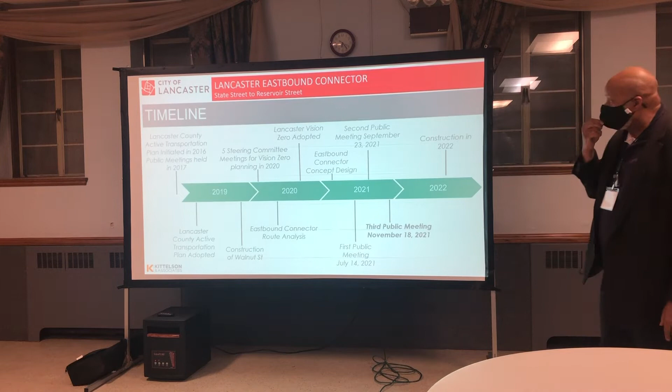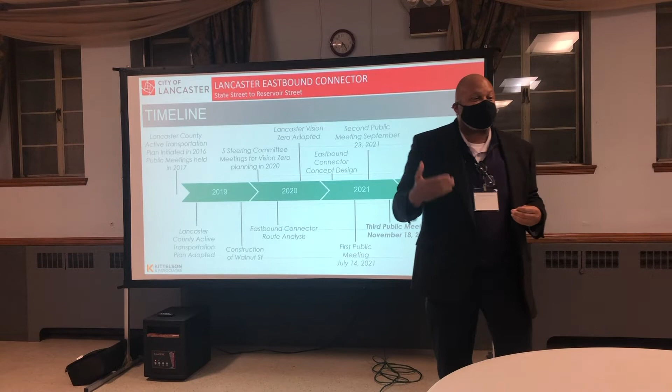As a quick reminder, the whole endeavor we're doing here is to try to make real something called the Lancaster County Active Transportation Plan that was initiated back in 2016. It was an effort to understand a variety of different ways that people can maneuver through the county and through the city as well. One of those key infrastructure elements was the bicycle network, connecting the bicycle network from within the city to the areas that go out throughout the county.

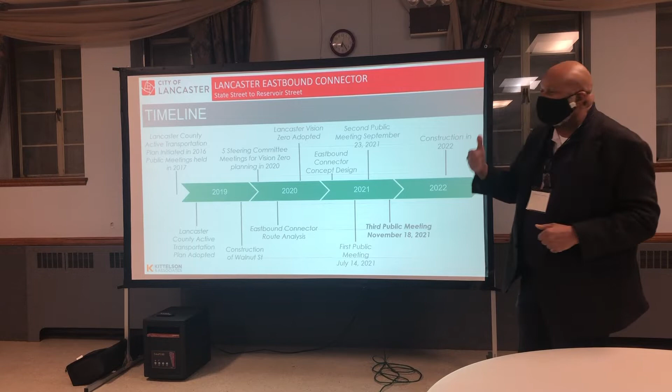There'll be more about that in the presentation, but the Lancaster County Active Transportation Plan was adopted in early 2019. The construction of Walnut Street was one of the first elements of fulfillment of that plan, and that took place also in 2019. There were 5 steering committee meetings related to Vision Zero planning in 2020, and a little bit about Vision Zero will be described here as well.

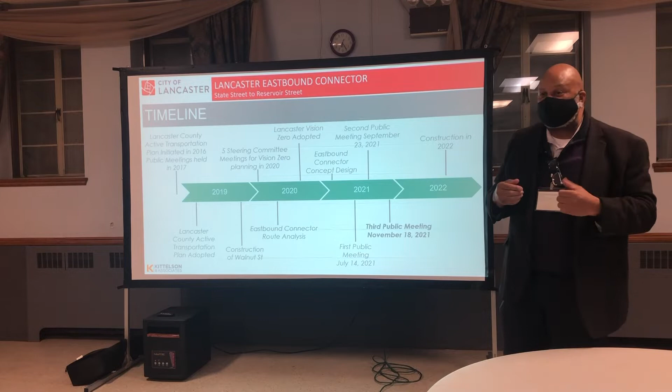The Eastbound connector route analysis was taking place in the early days, just before COVID started, in the early days of COVID, and a little bit of that explanation will be in this presentation as well. In mid to late 2020, the Lancaster Vision Zero was adopted — the idea that we will actually, and have, adopted Vision Zero as an initiative to reduce and eliminate dangerous accidents and deaths in the city of Lancaster by 2030. This active transportation plan is an integral part of the Vision Zero process. The Eastbound connector concept design was described in early 2021.

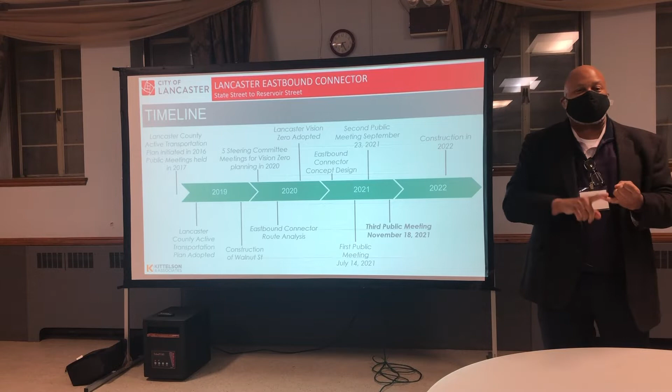The first public meeting related to the Eastbound connector was held on July 14th of this year. We realized that we did not necessarily give enough notice, and so we wanted to double down in our communications and the way we reached out to the community so that you understand what's going on. We opened up the Engage Lancaster site where you can submit comments at any time, and we established a more attenuated public engagement process so that we could make sure we're hearing from you and can respond.

The second public meeting was held September 23rd of 2021, and at that time we hoped we were addressing a number of the concerns raised earlier. We also let that be a more open forum to make sure that things that may not have been raised before, or that you felt weren't heard before, could be heard and understood. We hope understood well.

Tonight is a third public meeting which will be reflecting the input and what we've done to try to address those kinds of concerns. We're hoping you're going to be happy with it. We know that in public discourse we can't make everybody happy, but we are trying our best to do something we think can be part of a very strong, good, alternate transportation infrastructure.

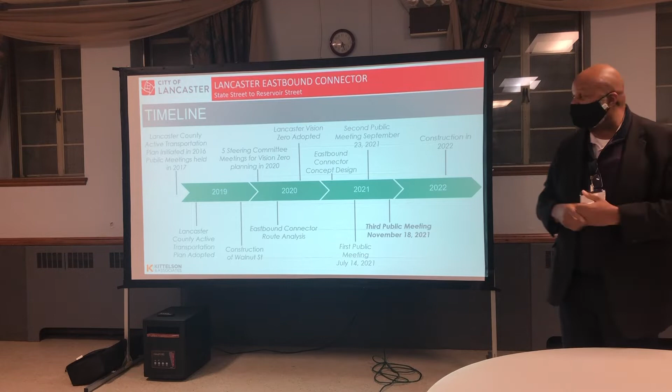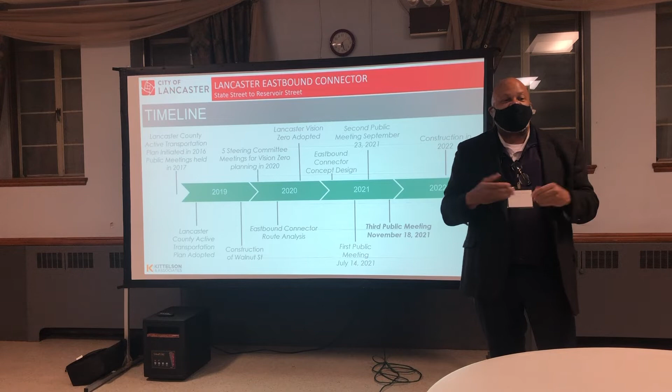We're anticipating construction for this to take place probably in late 2022. We realize that there is a water main along this stretch that will be installed over the earlier part of 2022, and of course we won't put the surface infrastructure on until that subsurface infrastructure is completed.

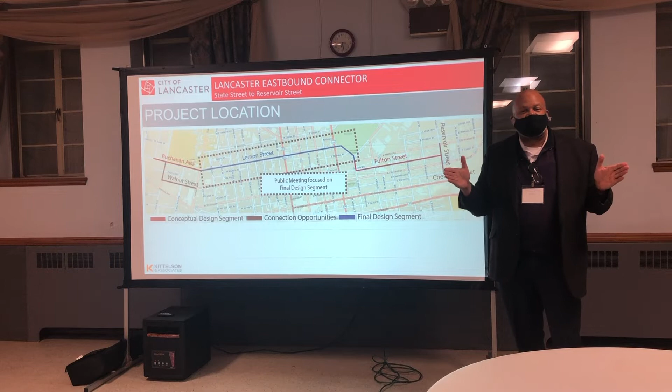So the public meeting tonight is focused on this particular stretch of Lemon Street from College Avenue over here to the park, to the cemetery. The rest of the Eastbound connector is going to be done in different stages, but the focus of the design we've been doing over the course of these last several months is just this particular stretch.

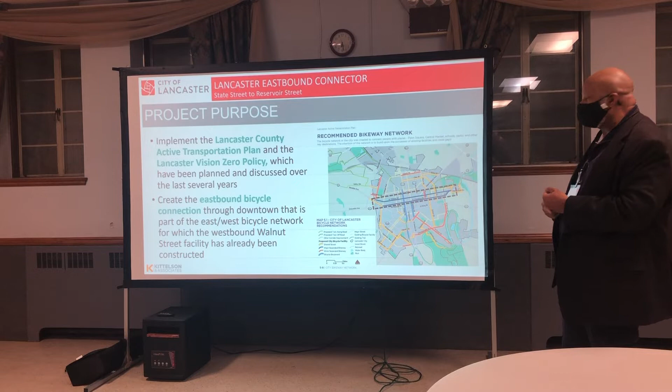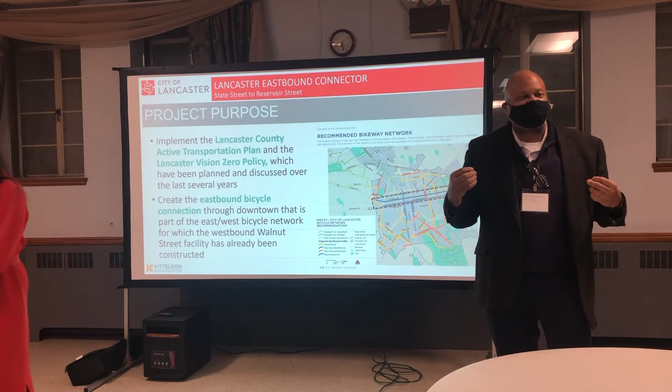So, shall I continue or shall I turn it over to you, Laura? I'm happy to. I'm going to turn it over to Laura, who is much better at describing some of the design elements that go into making the project. Cindy McCormick, who's the city engineer, and I are available to answer questions as we get later into the process. Carl Graybill, also from our office, is available to answer questions if necessary as well. So I'll turn it over to you, Laura.

Thank you. If everyone will just bear with me for one second. It didn't like the move. It wanted to stay in its same spot. Let's see if it'll come back and be my friend again. Thinking about it, thinking about it. Here it is, all right, current slide.

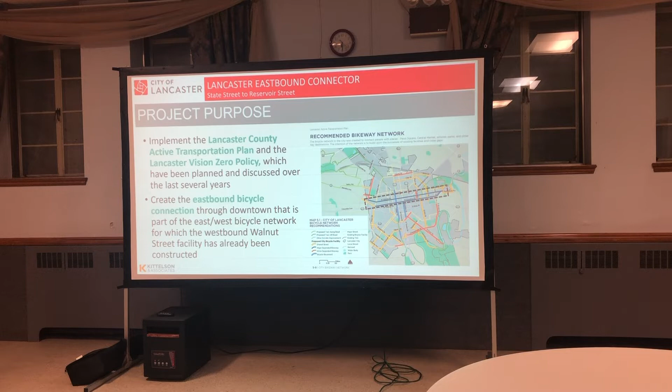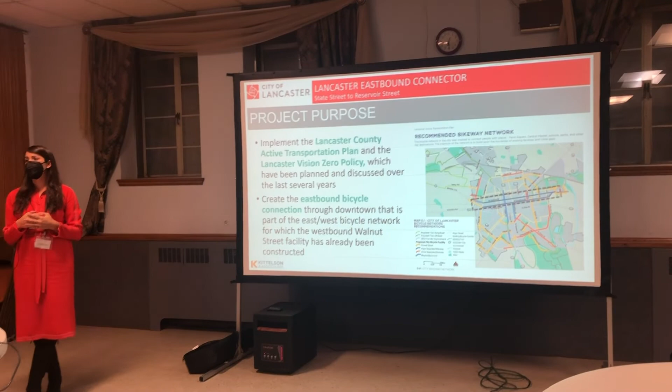Okay, sorry about that. For the project purpose, where this came from originally was, as Steve mentioned, this all started with the adoption of the Lancaster Active Transportation Plan and the activation of the Lancaster Vision Zero policy, which had been planned and discussed over several years. There was a series of public meetings over the course of developing those plans and a series of goals that were set—goals around creating better opportunities for non-motorized travel, increasing transportation options especially for vulnerable populations that don't have access to cars, around increasing safety, around decreasing the amount of fatalities and severe injuries. These were all of the goals in the public discourse that went into these two plans.

From them, the Eastbound connector was identified on the Active Transportation Plan as the eastbound route through the city of Lancaster. Walnut Street was identified as the westbound. This is really an opportunity to make a pair with Walnut Street, so you can go westbound on Walnut and eastbound on Lemon.

I do want to note that when this plan was first identified, Chestnut Street was the route originally identified to be the eastbound route. However, when we looked more deeply into the traffic volumes on Chestnut and the typical street section, we determined that was not going to be a feasible location to do a separated bicycle facility.

In order to get a separated bicycle facility there, you would need to remove an entire lane of parking for the extent of Chestnut Street, which we recognize is not feasible in a parking constrained area.

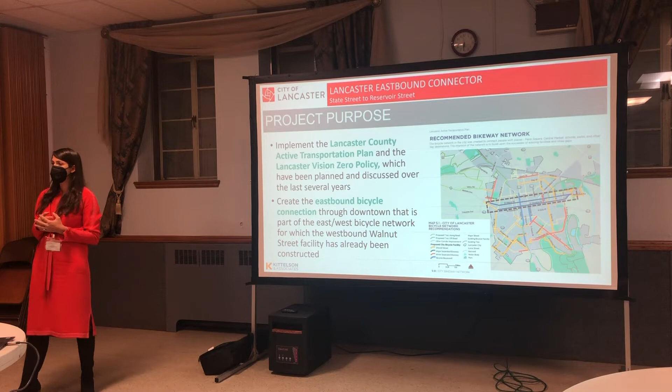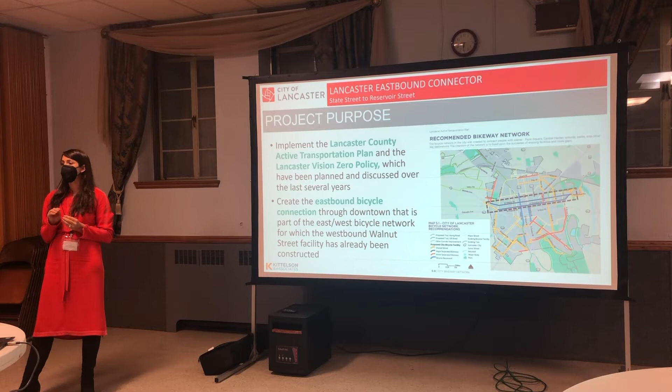So we did some additional analysis to look at other routes that could achieve that eastbound separated facility. We recognize there are other places in the city where you might be able to ride with traffic and feel fairly comfortable. But throughout the active transportation plan process, we were trying to identify separated facilities that can work for the largest number of riders, those who don't feel comfortable being with traffic. They need a separated facility to make them feel like they're able to be out riding.

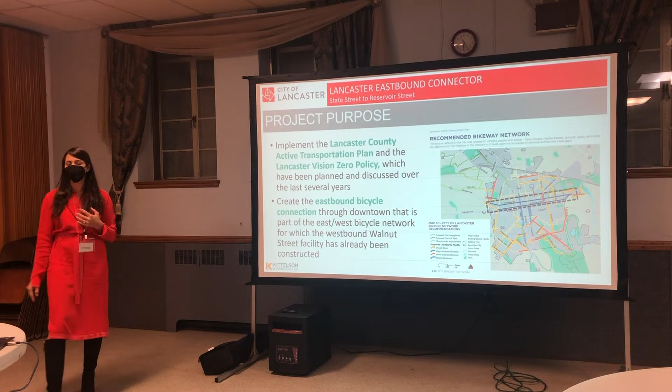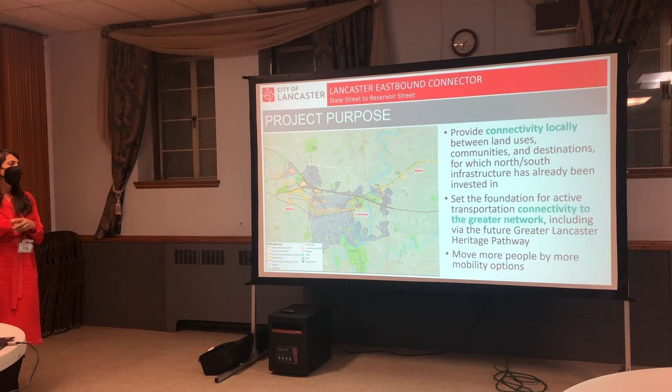In addition to the connectivity just directly in downtown Lancaster, there's also an opportunity to connect to the larger regional network through the future Greater Lancaster Heritage Pathway. You can see here how that connection is going to allow people to travel by bike to larger areas within the region.

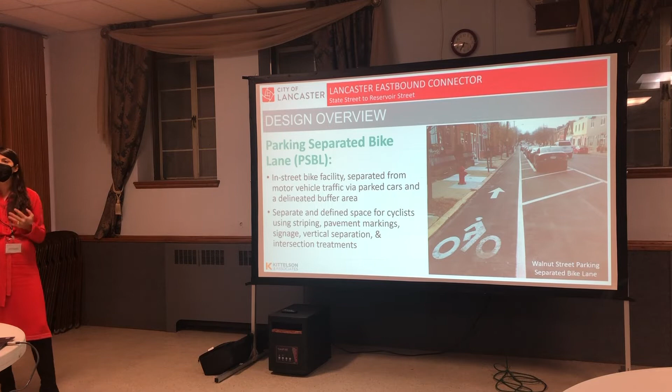Traditionally, when we think about parking, we always think about doing it right up next to the curb, then you might have a bicycle lane next to it and then travel lanes. In a parking separated bike lane, you switch the directions of the parking and the bike lane, so the bike lane is right up next to the curb. This is what you see on Walnut Street today.

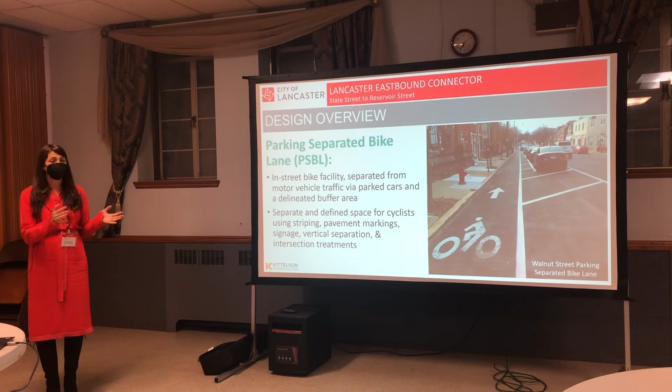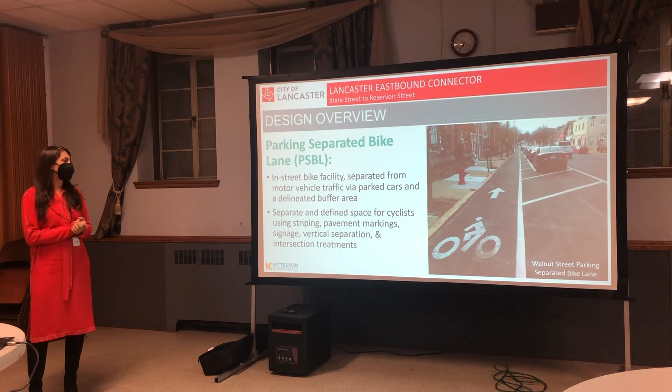There's then a buffer area between the bike lane and the parked cars. This provides room for a driver to open their door and not hit the cyclist riding through. And then you have the lanes of travel next to it, which once again provides that physical separation between the cars traveling on the street and the bicyclists in the bike lane.

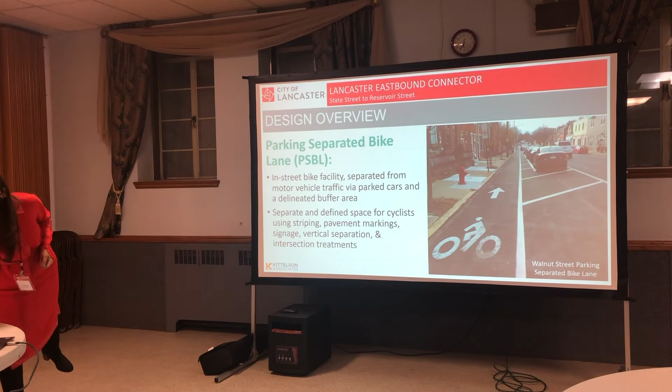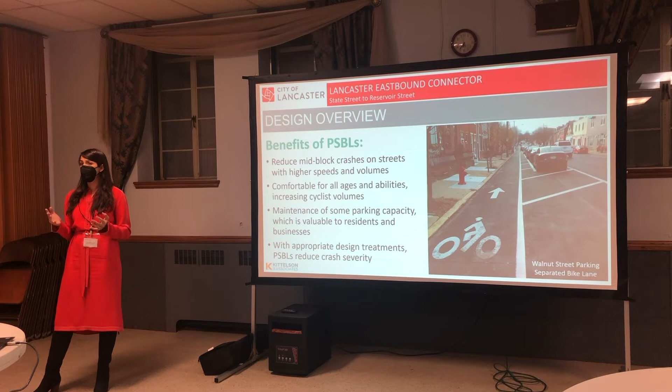Parking separated bike lanes are starting to be adopted more and more throughout the US. They've evolved as we recognize the need for safe separated facilities while also recognizing that we need places to park our cars. This means there's a bit of a trade-off for everyone. There are spots where you might lose a parking space at intersections to keep things clear. However, it does keep the majority of the parking as opposed to some other bicycle facilities that might require the removal of parking.

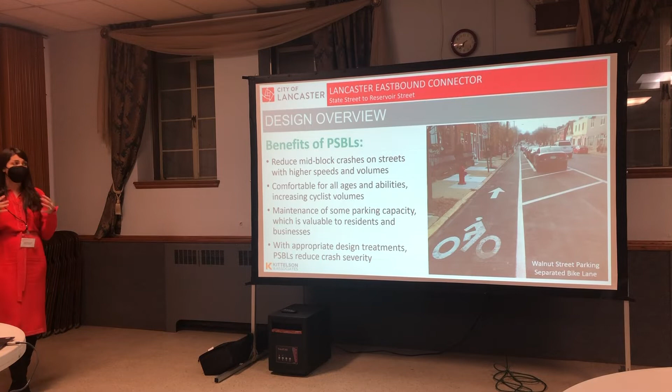One of the helpful things parking separated bike lanes do for safety is reduce the number of mid-block crashes on streets, especially with higher speeds and volumes, because bicyclists are fully protected mid-block and aren't getting hit by passing cars. This is critical for Vision Zero, since mid-block is where you have the highest number of fatalities and severe injuries, because cars are traveling fastest there. If you're on your bike and get hit by a car mid-block, it's very problematic. As cars slow down, that's where we see those severe injuries and fatalities lessening.

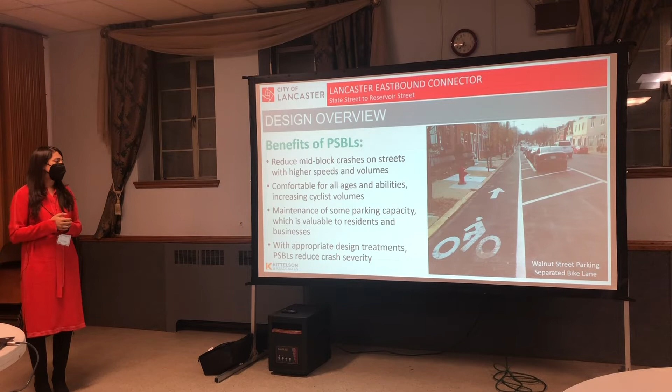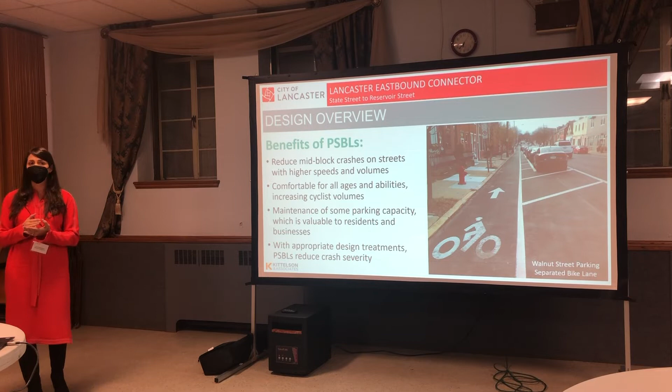It creates comfortable facilities for all ages and abilities while also increasing cyclist volumes as folks feel more comfortable using the facility. It does maintain parking in some capacity, and when appropriate design treatments are used, it can also reduce crash severity and make things safer at intersections. That intersection design is something we're really going to focus on in the meeting tonight, to tell you how we've changed the design for the intersections.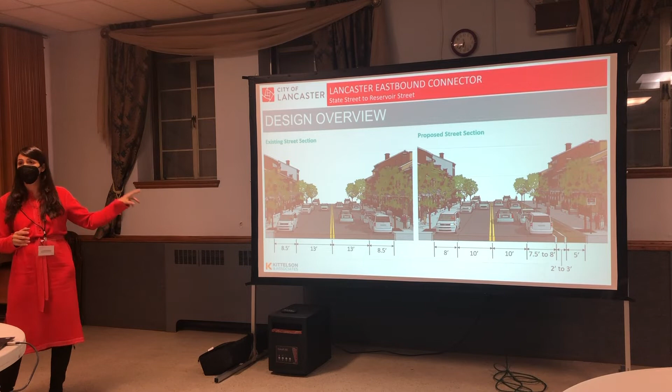Here you can see a typical street section of Lemon Street today on the left, and the proposed street section on the right. In the existing condition, there are two 8.5-foot parking lanes on either side of the street and relatively wide 13-foot travel lanes, one in each direction. In the proposed condition, we keep an 8-foot parking lane on the north side, two 10-foot vehicular travel lanes, a 7.5 to 8-foot parking lane on the south side, a 2 to 3-foot buffer, and then the 5-foot bike lane next to the curb.

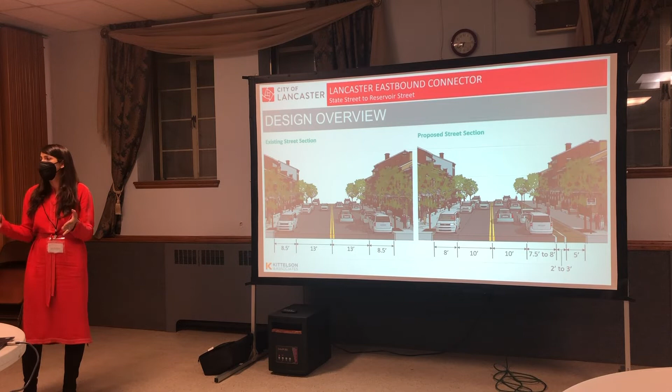I do want to note that the parking lane widths have evolved over the course of the project. At the first public meeting, we had narrower parking lanes and a wider buffer for the bikes, but we heard from folks that 7 feet is too narrow for these parking lanes. That's why we made sure the north side stays a consistent 8 feet. We only narrow it to 7.5 on the south side where Lemon Street is a bit more narrow, which is why you see that range between 2 and 3 feet for the buffer and 7.5 to 8 for parking. So the smallest buffer we have is 2 feet, and the smallest parking lane is 7.5 feet.

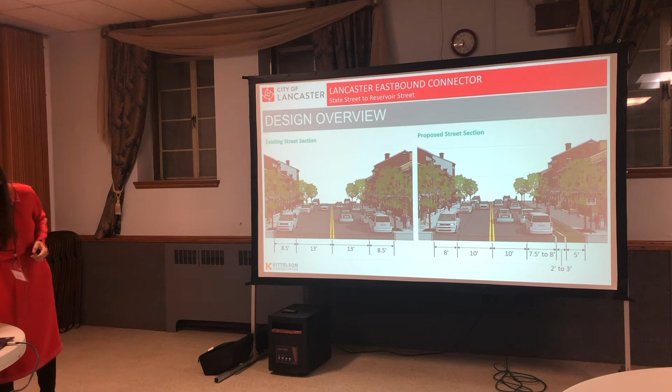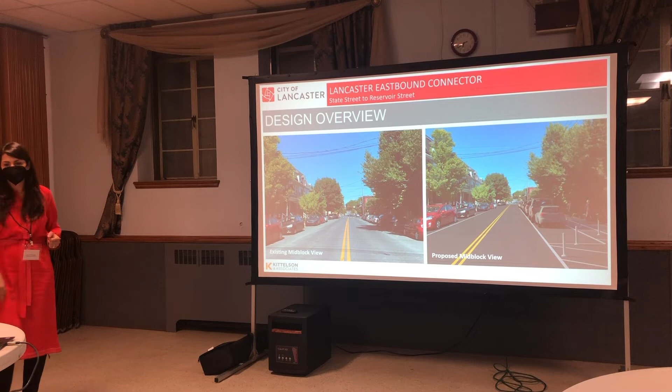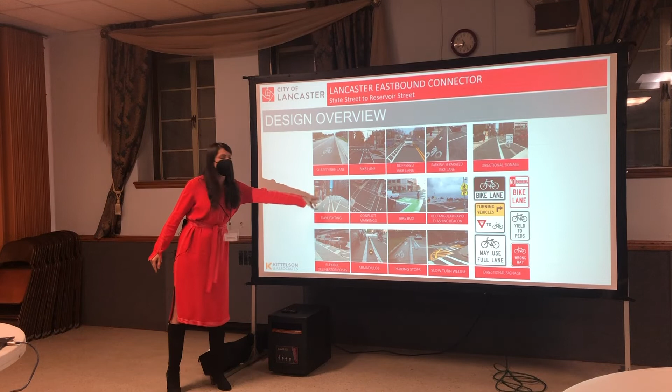This is where you ensure that you don't have parked cars right up to the crosswalk, to keep sight lines very clear. We're looking at flexible delineator posts that you can put in to outline those daylighting areas. We recognize that just painting a daylighting area doesn't mean that people don't park there. The flex posts will keep people from parking there.

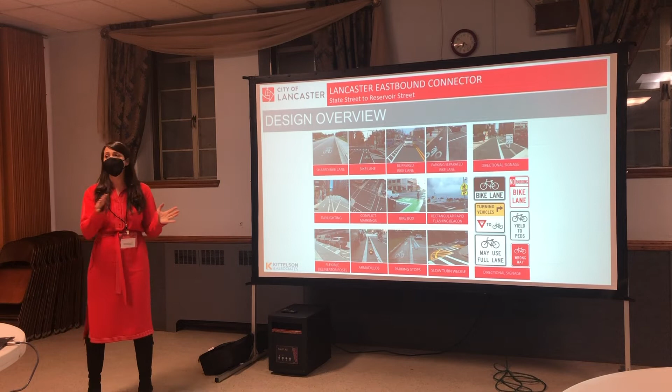We're looking at slow turn wedges, which you can see here. This is something else we'll be talking about more as the presentation continues. What that does is really slow traffic turning. So if you're traveling eastbound on Lemon, a slow turn wedge is going to keep cars that are turning right in their lane and going as slow as possible around that turn. We've heard on Walnut Street the concerns around cars moving quickly, making a turn, not seeing bikes. This helps to slow things down, especially combined with the delineator post that keeps the daylighting area clear.

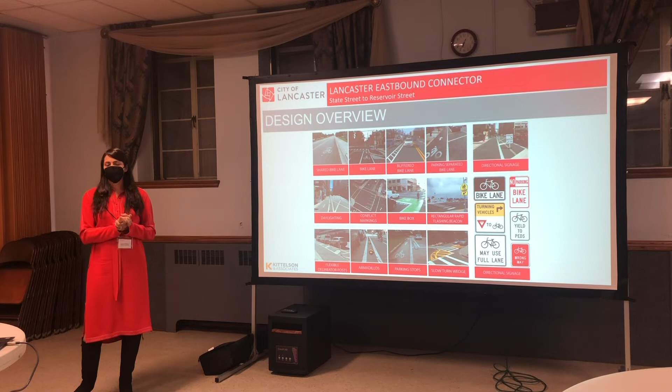We're looking at bike boxes to help move bicyclists from the bike lane into another bicycle facility. We're looking at signage that alerts folks to a bike lane beginning or ending, noting that bicycles may use full lane in other areas of the corridor, that there's no parking, it's a bike lane. Different treatments that are going to alert folks to what's happening along the corridor and let them know how they should be using the space.

One of the questions we received last time is, what defines success for this project? How would you say the project was successful? From our perspective, the main way this would be seen as successful is that we would be reducing motor vehicle speeds and getting them closer to 20 miles per hour. That 20 mile per hour number is key when you're talking about Vision Zero, because if you're going 20 miles per hour and someone does happen to get hit, you're much more likely to have a positive outcome — less likely to have a fatality or severe injury. So we're trying to keep those speeds slow. It's been shown many times that narrowing the lanes makes traffic move slower, and will reduce the number of severe fatalities happening along the corridor today.

Another indicator of success would be an increase in the number of people biking. We have bike counts that were done just this past year. We can share that data with you tonight, and being able to see those numbers increase over the years as more and more folks feel comfortable using the facility is another thing that would point us to success.

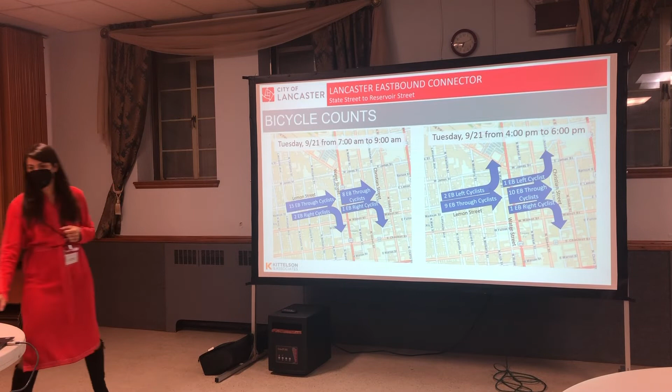We also received a question about why James Street wasn't considered as an alternative instead of Lemon Street, since it has relatively low traffic volumes. We did look at James Street. It is a narrower roadway, so there isn't a way to put a separated facility in there.

We talked earlier about the fact that an active transportation plan for the city will have a lot of different types of corridors. You'll have some spots where people travel with vehicular traffic, and we want to put those as much as possible on low volume streets. But the vision for the active transportation plan was to have dedicated facilities in the eastbound and westbound route, and James Street is not feasible for that given the amount of width in the road. You can't get that separated facility on there.

We received a question asking why the city is proposing a parking separated bike lane instead of a traditional buffered bike lane. Mainly, we want to talk about the appropriate speeds and volumes for these different types of facilities, reducing crashes on the Vision Zero network by creating as separate a facility as possible, and carrying out recommendations from the Active Transportation Plan and the Vision Zero Action Plan, both of which point to the need for a separated facility rather than a buffered one.

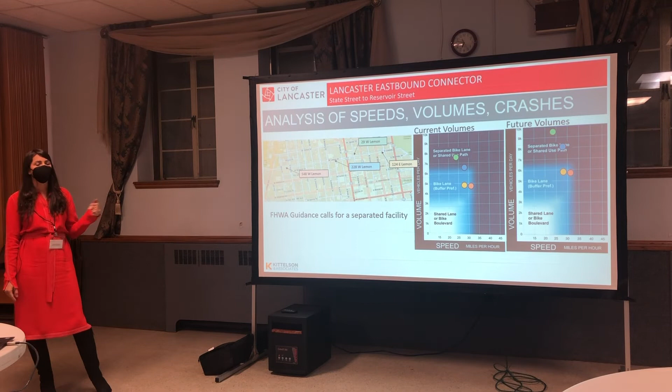To go into a bit more detail, if we look at the volumes on Lemon Street, the Federal Highway Administration guidance has a chart showing how, as speeds and volumes go up, your bicycle facility needs to become more and more separated for it to be safe.

The dots there coincide on this chart with the current volumes on Lemon Street, and if we look over time as volumes increase, we can see that those dots are getting more and more into the range where you need to be in a separated bike lane to make this a safe facility.

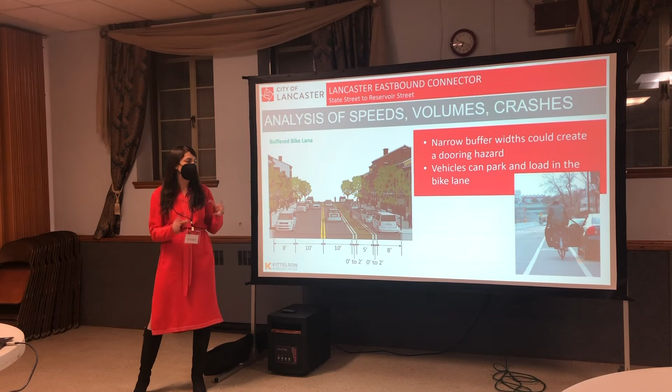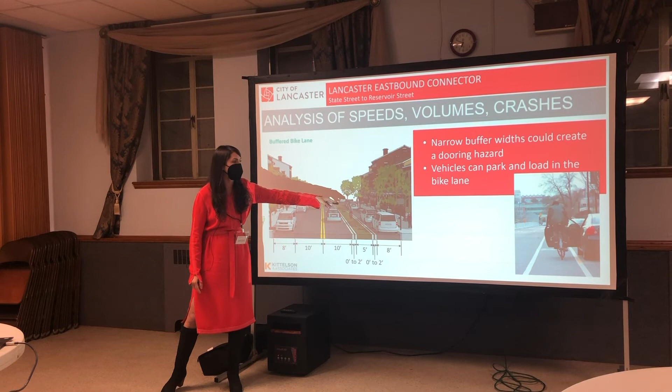Once again, this is federal guidance, something we go to again and again to determine the appropriate facility type as we're choosing bike lanes throughout the country. From a volume standpoint, it's pointing towards a separated facility rather than a buffered one. One reason is that with the buffered bike lane option, because we have a limited amount of buffer available, especially in narrow parts of the corridor, we get only less than zero to two feet between the bike lane and the parked car lane, which can easily result in the condition you see in the photo of bicyclists getting doored. As a driver opens their door, they open it into the bike lane, which can be very dangerous for cyclists moving through the corridor.

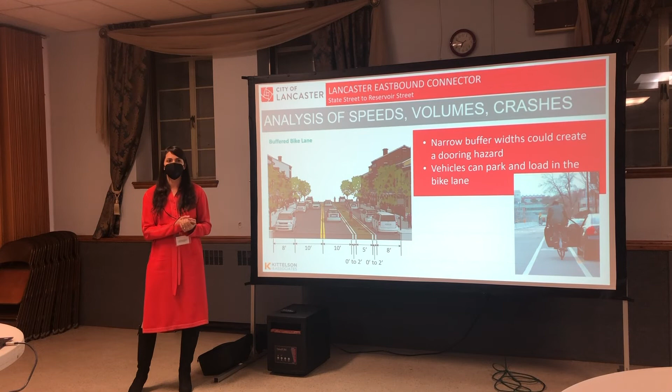So with that, I'm going to transition into some of the conceptual changes we've made to the design as a result of the questions and comments received at the last public meeting. But before we get into Lemon Street, one thing we heard loud and clear at our last meetings was that we need changes to Walnut Street. There are safety issues there that need to be addressed, and before we go too far with Lemon Street, we want to make sure Walnut is being addressed. So we'd like to share the design changes proposed for Walnut Street, which could likely be installed this spring, and talk through how they will change how the corridor is used. There are similar treatments to what we're looking to do on Lemon Street as well.

To summarize, we're looking at adding flex posts at intersections to mark out areas so cars can't park in daylighting zones. We're adding an inlet bend out to increase visibility at intersections. We're adding daylighting at some cross streets to improve visibility, and extending daylighting where visibility is poor today, creating extra space without parked cars. We're adding slow turn wedges at some intersections to keep cars moving as slowly as possible as they cross in front of the bike lane, adding bike boxes at some intersections to help bicyclists move onto other connected facilities, and adding signage—no parking, bike lane, and other signs—to alert cyclists, drivers, and pedestrians to how the corridor is intended to be used.

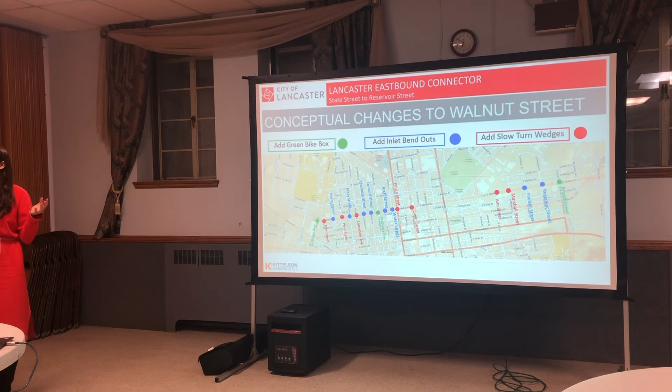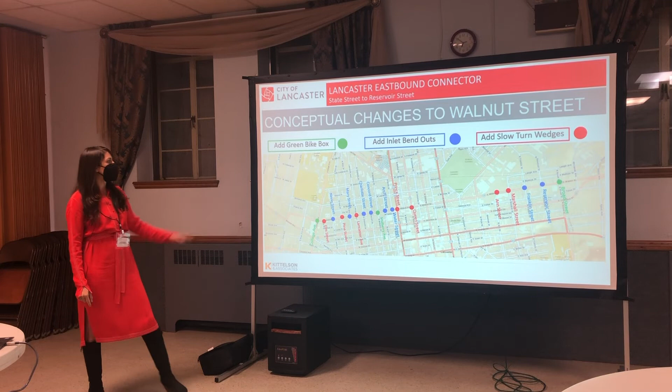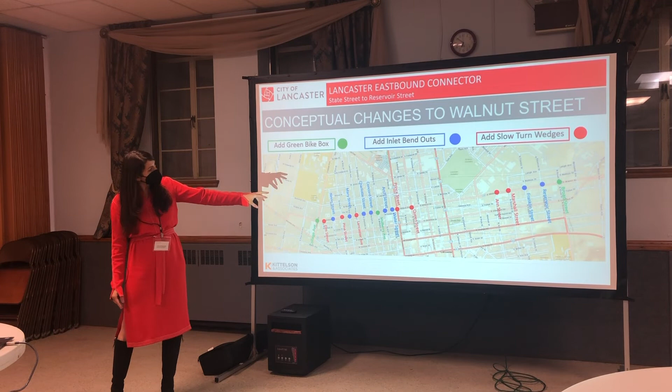Here you can see a summary of all the intersections where we're recommending these changes. In green, we're looking at new bike boxes at College Avenue and Mulberry Avenue. We're looking at adding inlet bend outs at Nevin, Mary, Charlotte, Concord, Arch, Water, Franklin, and Reservoir. And we're also looking at slow turn wedges at Elm, Pine, Lancaster, Prince, Queen, Anne, and Marshall.

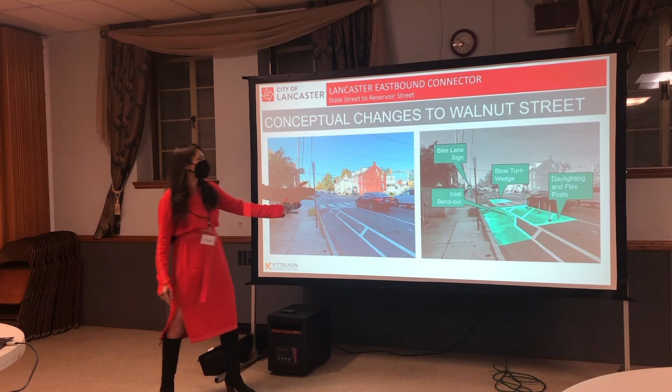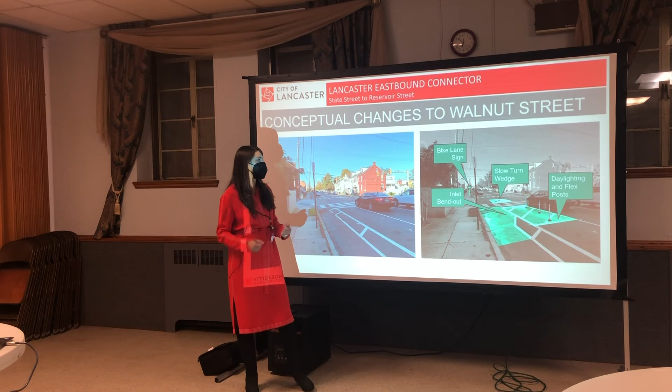To give you a sense of how some of these improvements might look on Walnut Street, the photo on the left shows the existing parking-separated bike lane on Walnut today. Here's how we can add in these treatments to make that intersection safer. We add the inlet bend out—since we know bicyclists don't feel comfortable riding through this inlet, which is very sunken and can be jarring on a bike—to alert them that they should shift somewhat at the intersection.

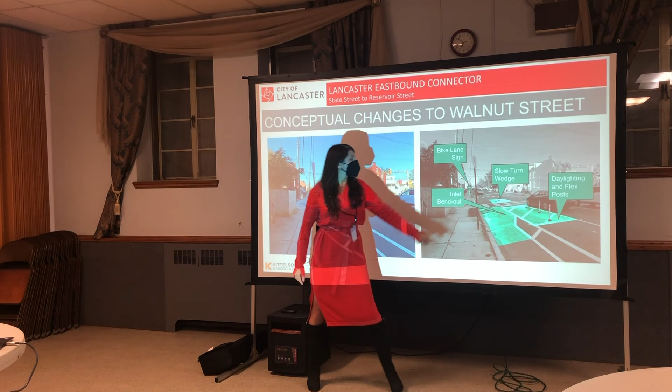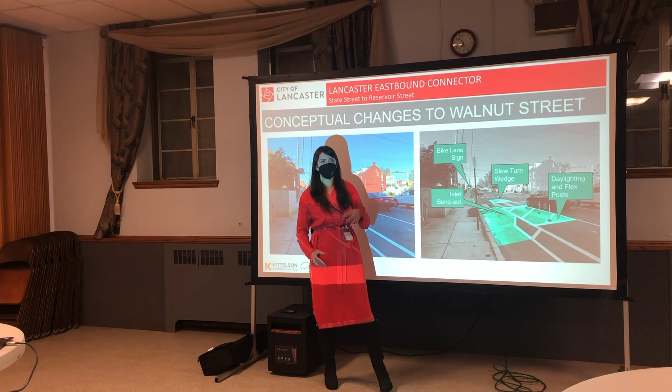We also have the slow turn wedge, located right in front of the crosswalk. As a car makes a left turn here, a small raised structure helps slow them down and keeps them in their lane around the wedge. They get a full view of the bike because it approaches at a right angle instead of cutting the turn in front of the crosswalk. We also have daylighting and flex posts at the intersection.

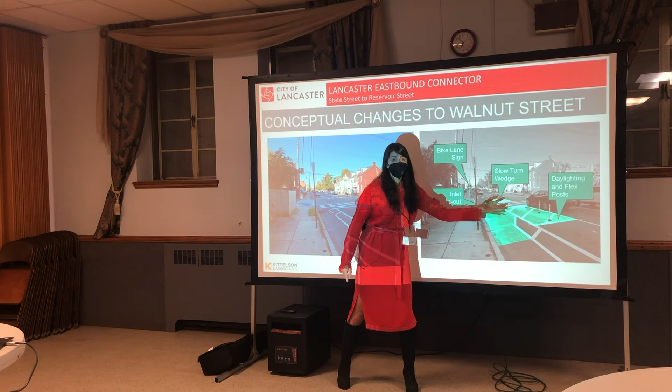Once again, this ensures there's not a car parked here, so the cars moving through can see the bikes. They have visibility on them, and the bikes can see the moving cars. It makes everything much safer at the intersection, and also adding bike lane signage to alert drivers that this is a bike lane.

We've heard from many of you, both bicyclists and non, about how these intersections on Walnut aren't working today. We're confident these kinds of improvements, which are best practices used nationwide, are going to make these crossings much safer. As mentioned, there are multiple locations along the corridor. Wherever we have turning cars coming in front of the bike lane, that's where we're looking for these types of treatments, and we're also looking to do those on Lemon Street.

To summarize what has changed since our last design, we're looking to remove those mid-block flex posts. We want to focus the flex posts at the intersections where you're going to get the most bang for your buck, making sure cars are not parked in the daylighting area. Mid-block, in a lot of observations of the corridor, we're finding cars are not parked right up to the curb, so we feel confident folks are used to how this facility is supposed to be used. We don't need to put those flex posts mid-block, so we're going to focus those at the intersections.

We're adding bike lane bend outs at some intersections to increase the visibility of bikes. I'll talk about those in more detail and show some images. We're adding slow turn wedges at some intersections, similar to what we're doing on Walnut Street. We made some changes to the Water and Lemon Street intersection, recognizing there are concerns around sight distances, especially for cars moving northbound on Water that are creeping out into the intersection. How can we increase visibility there? And then adding signage similar to Walnut Street.

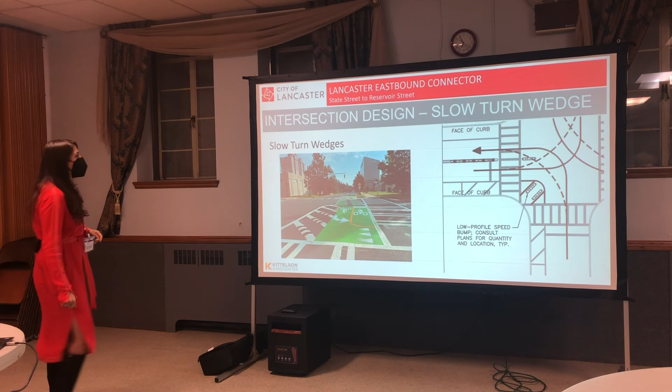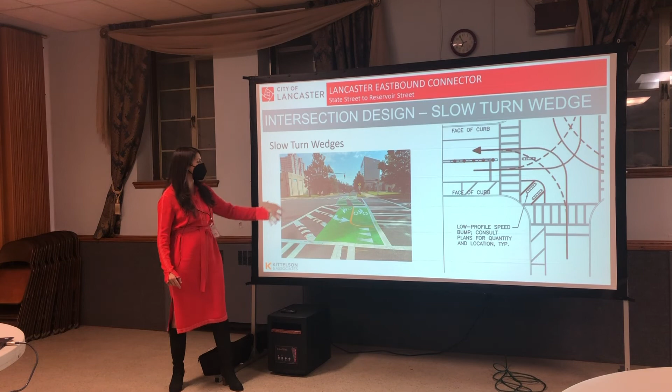This is a zoom in of a slow turn wedge. You can see this is a two-way bike lane going through an intersection, and these are the raised pieces of the slow turn wedge. A car making a right turn here can't just cut across the bike lane. They have to be out into the intersection, which forces them to go as slow as possible and provide the greatest amount of visibility between the bicyclist and the car moving through the intersection.

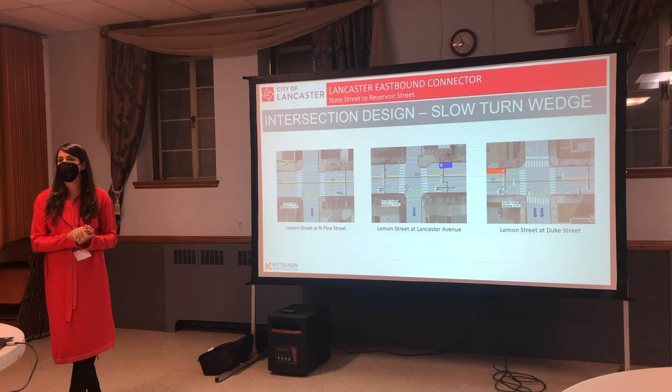Here you can see the design of this at some key intersections, Lemon and Pine Street. So here's the slow turn wedge, Pine heading south. The bicyclist would be here right next to the curb, and this ensures the car is all the way out here when it goes to make its turn. We show these also at Lemon and Lancaster and Lemon at Duke Street. You're welcome to take a look at these in more detail at the roll plots after the presentation if you want a closer look.

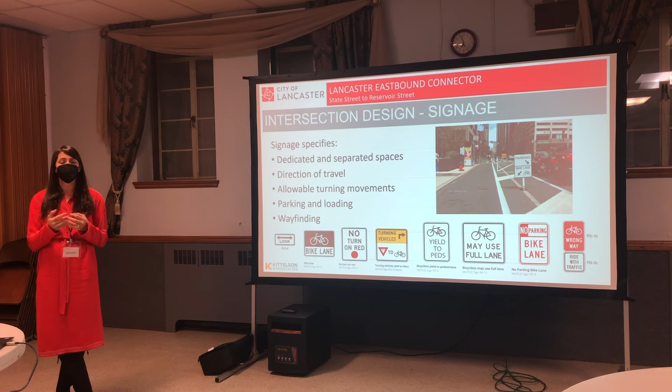Signage will be another important thing added here: putting in signs to alert people to the start and end of a bike lane, signs that alert turning vehicles to yield to bicyclists, no turn on red, bicyclists may use full lane. We'll also be posting no parking signage to show areas where parking is not allowed. We recognize that without this signage, it can be very confusing how the corridor is supposed to be used, and this will help further delineate that.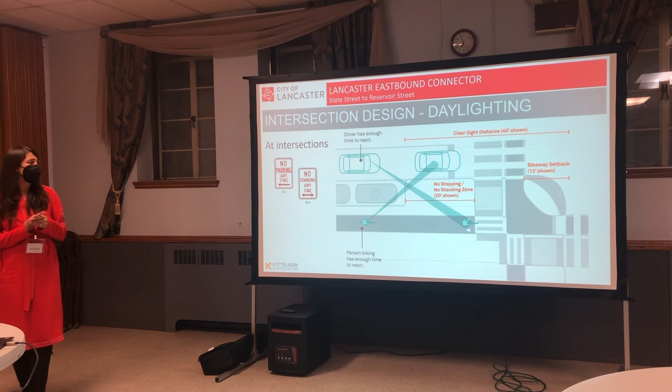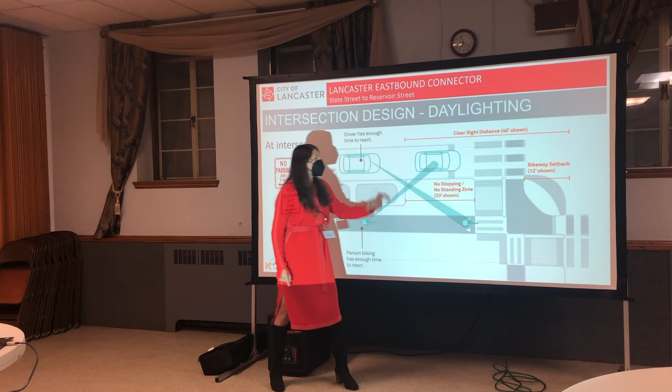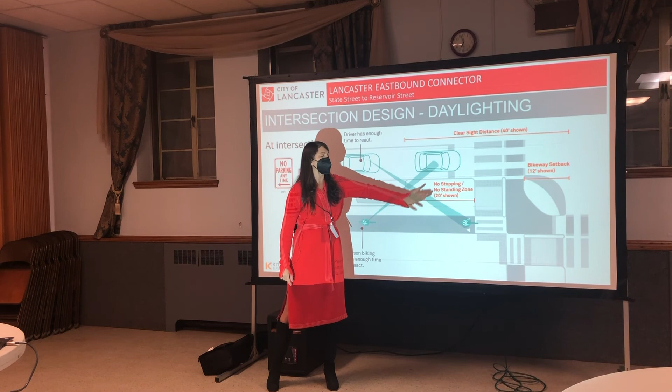Daylighting is another thing, and as I mentioned, especially using the flex post to delineate it. Daylighting typically means you cannot have parking right up to the crosswalk. This is critical because if there's a car parked here, both the car and the bikes have no idea the other is there, especially when cars are coming in to do a turn in front of bicycles. Keeping that daylighting area in front of the crosswalk clear is very critical, and also identifying areas where that space might need to get longer based on sight distances.

That's one of the things we looked at with the intersection at Water Street. We know it's not enough to just paint the daylighting areas. To really be effective, we need to add flex posts at the corners to ensure cars can't park there and make that intersection as clear as possible for all users. That's something that will be added to the Lemon Street project as well as Walnut.

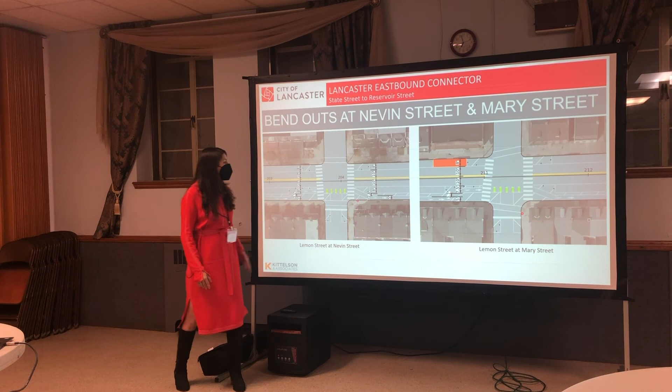We also want to talk about bend outs. We recognize that in the tight grid Lancaster has, with buildings built up straight to the edge, when cars move northbound they tend to creep out further and further to see around and know when it's clear to make a turn or move through the intersection. With bicyclists right up next to the curb, that sight distance becomes very tight, and it's problematic for both the bikes and the cars.

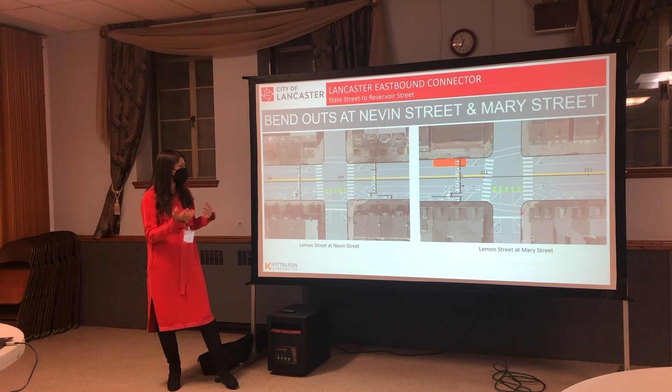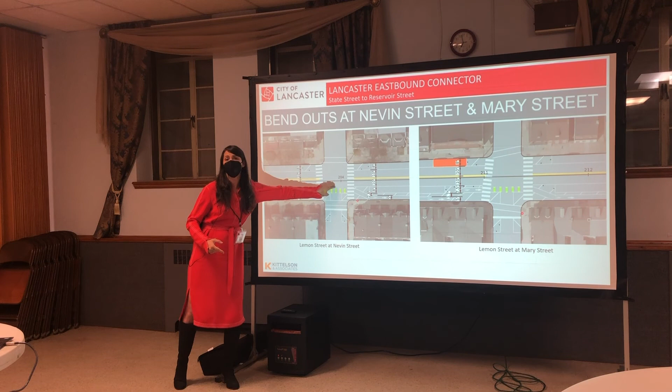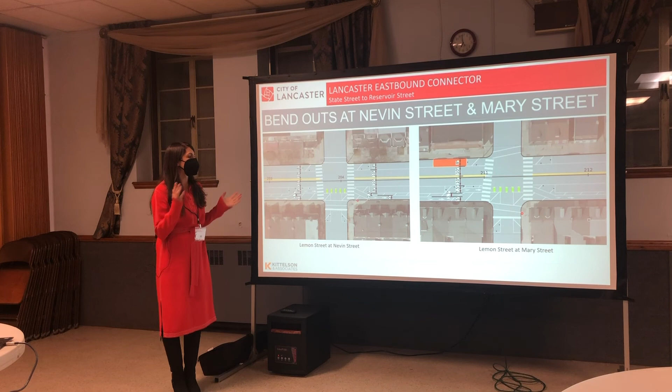So at a couple of intersections, such as Nevin and Mary Street, we actually bend the bikes out so they are further into the intersection, near the center lane of the road, making them much more visible to cars waiting to move through the intersection. You can see they bend out, and then after the intersection they move back in next to the curb. We're looking at that at Nevin and Mary Street, and also at some locations on Walnut Street. I invite you to look at the roll plots if you have more questions about how those work.

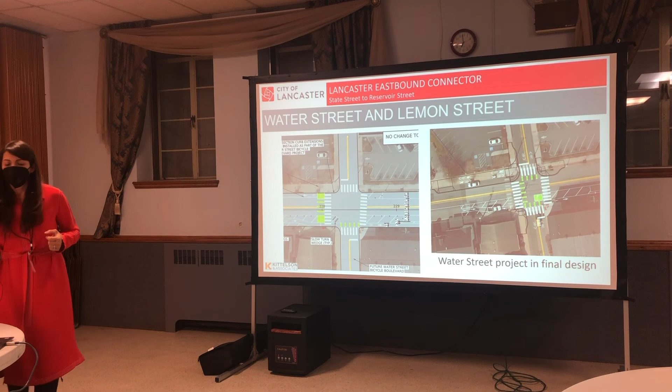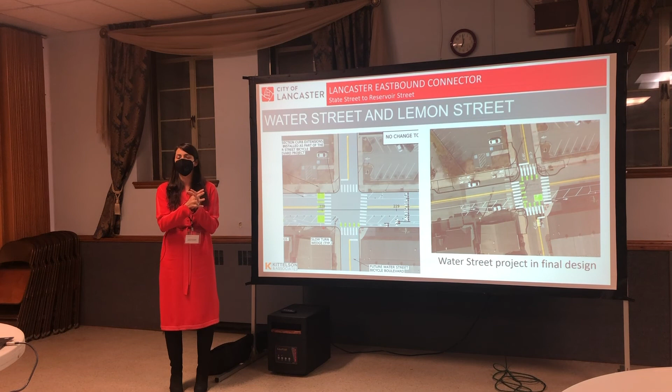Another intersection that came up a lot in conversations with the community is Water Street and Lemon Street. We took a closer look at the crash data and recognized that sight distances are a major issue here, based on the existing condition where there's a tall building right next to the corner, especially in the southeast corner. As cars come out trying to figure out if they can move through the intersection, it's very tight. So we extended the parking daylighting in the southeast corner further, which will help address that sightline issue and make it better for all users.

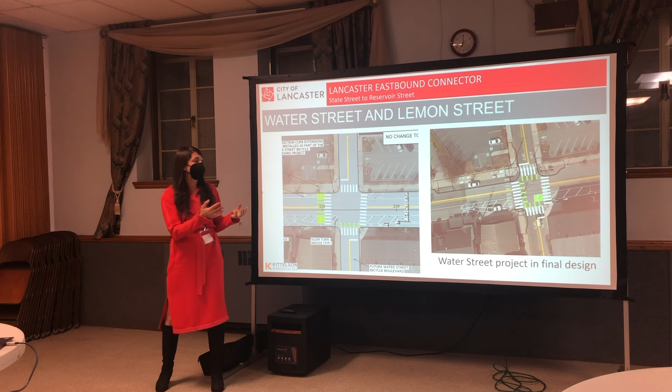We've also added a slow turn wedge at this intersection, and we want to note that the plan shown here would be constructed as an interim solution when this project goes through, probably at the end of 2022. However, we're also working on an intersecting project, the Water Street Bike-Ped Boulevard, which will have more permanent solutions to the intersection and some changes to the curbs and sidewalks.

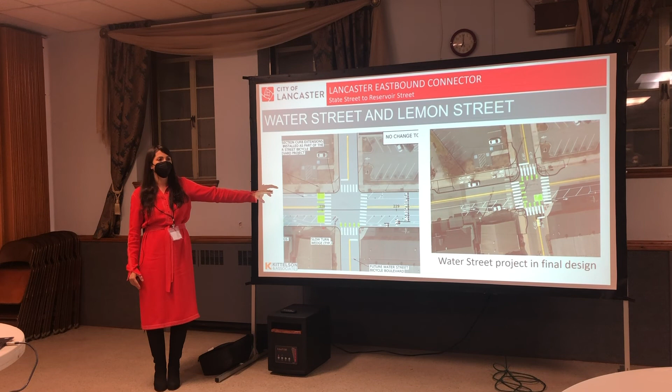When that ultimate project is done, the north side of the street will have a wider sidewalk serving as a shared use path with a direct connection to the linear park at the northwest corner of the intersection. In the interim solution, we show a painted bike lane, a crosswalk, a painted bike crosswalk, and then a bike lane to provide that access. But the long-term solution will be that shared use path on the north side, also mimicking the bend here and the extended daylighting. There will be further design work on that intersection, but these are improvements we think we can get in the ground much sooner as part of the Eastbound Connector project.

That concludes all of the design changes made after the last meeting. In terms of next steps, we'll be looking to incorporate the public input from tonight's meeting, similar to how we've done at other public meetings on the project. Then we'll move into the final design phase, getting these plans into final construction documents, with anticipated construction in 2022.